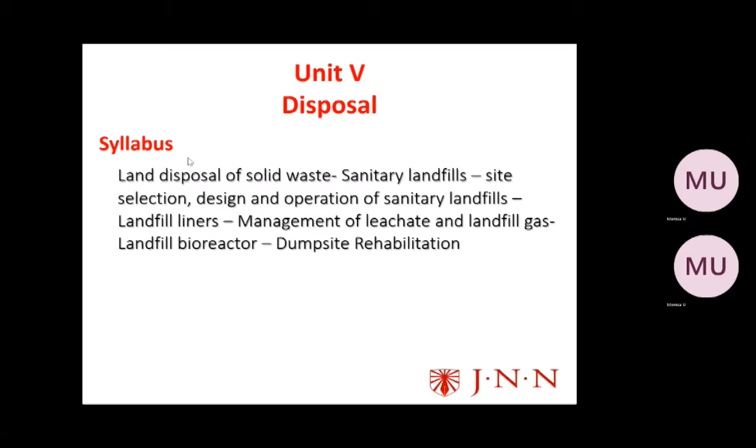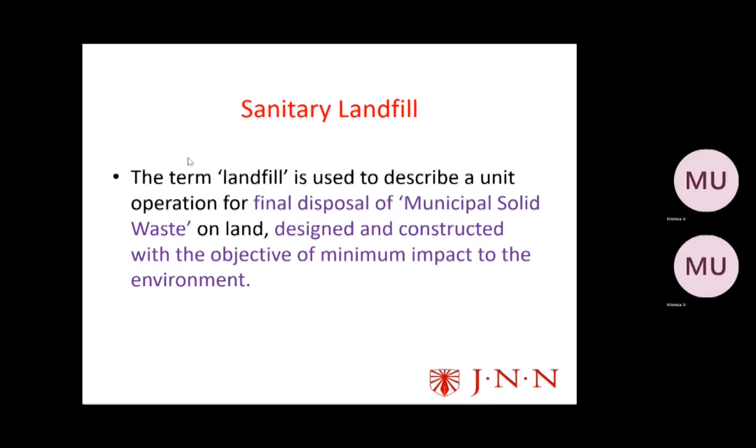Next, dumping of solid waste. Dumping is nothing but - in detail, I can say dumping is we have to dig a pit, and inside that pit we have to put all the waste, and we have to close it in a proper way. That is called dumping.

So it is a mixed waste not found suitable for waste processing. Then pre-processing, post-processing rejects from waste processing sites. Then coming to the non-hazardous waste not being processed or recycled.

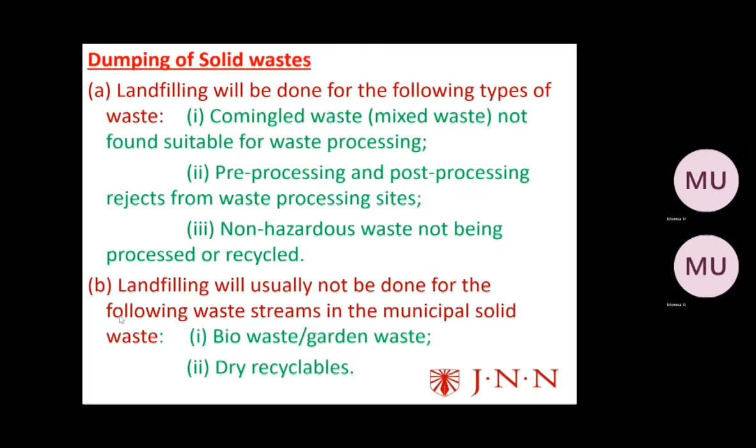In this point, what they're saying is, for example, we can take a chemical factory, and there are some very hazardous, very dangerous, toxic chemicals that are obtained as an output of a particular product. So that hazardous waste is being collected. Now I have to dispose of it. I cannot burn it, or either I cannot incinerate it. I cannot do anything with it, right? So I have to now dump it.

So I have to get permission from the government to a particular site where the hazardous things have been dumped into the ground. I have to get the permission of the government, and only then can I eliminate that particular toxic waste.

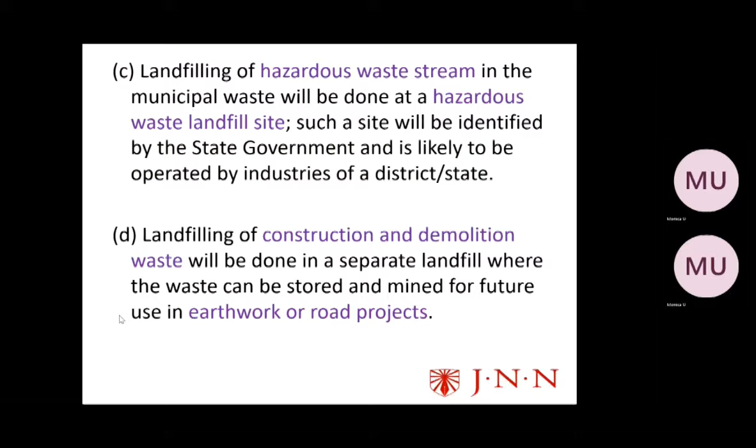Going into the fourth one, landfilling of construction and demolition waste will be done in a separate landfill where the waste can be stored and mined for future use in earthwork or road projects. So coming to a civil thing, all the construction and demolished building parts, or all that waste, will have a separate place to be thrown, so that in future, when there is a need for us to put these things into earthwork, before constructing a building or a road, or before constructing a structure, we should have some landfills, earthfills, right? So for that purpose they will use this demolition waste and so on.

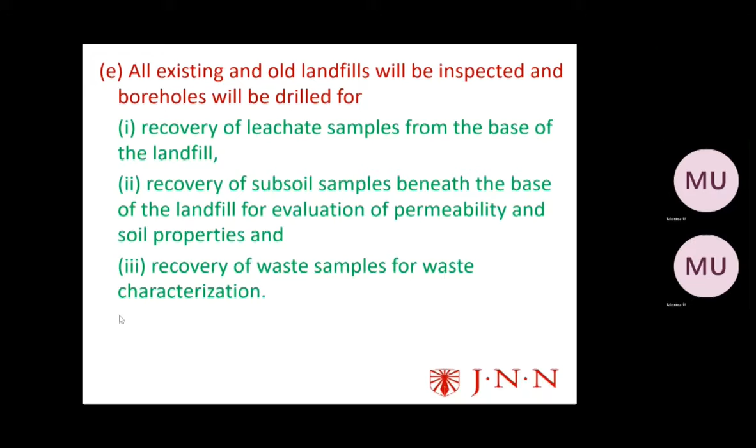Now we know about what is landfill and what are the types of landfill, and what are the categories of waste that has been thrown into different types of landfills. Now, what are the important parts of landfill? That is the essential components of a landfill. There are seven essential components of a municipal solid waste landfill.

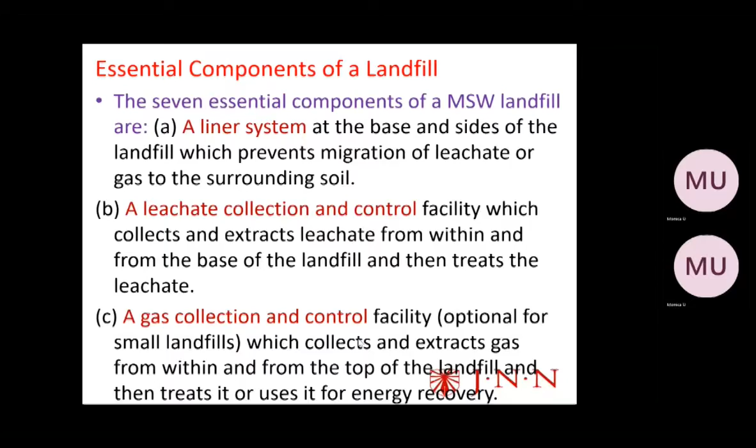Then there is a final cover system at the top of the landfill, which enhances surface drainage, prevents infiltrating water, and supports surface vegetation.

Here, in that point, they are saying there will be a liner at the top of the landfill. That is what they are referring to as a final cover system.

And then a surface water drainage system, which collects and removes all the surface runoff from the landfill site. So when there is a normal surface here and underneath there is a landfill, all the water runoff or other types of waste should not infiltrate or go inside this.

So there will be a proper runoff system besides this, or other arrangements according to the plan. That is the surface water drainage system.

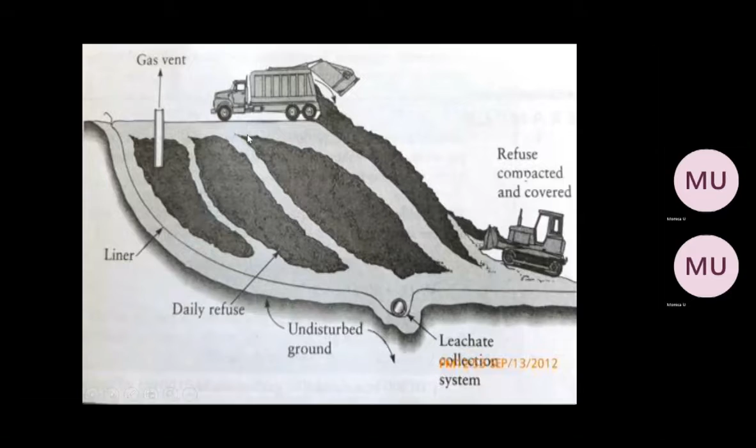And an environmental monitoring system which periodically collects and analyzes air, surface water, soil gas, and groundwater samples around the landfill site. So there will be a monitoring system, a particular team, similar to what we saw in the transfer station.

There is a team which operates and monitors all the equipment and its process. Similarly, there will be an environment monitoring system where they periodically check, collect, and analyze the air, surface water, soil gases, and groundwater samples.

Everything is checked, and if there is a change in any composition, then they will check into the landfill.

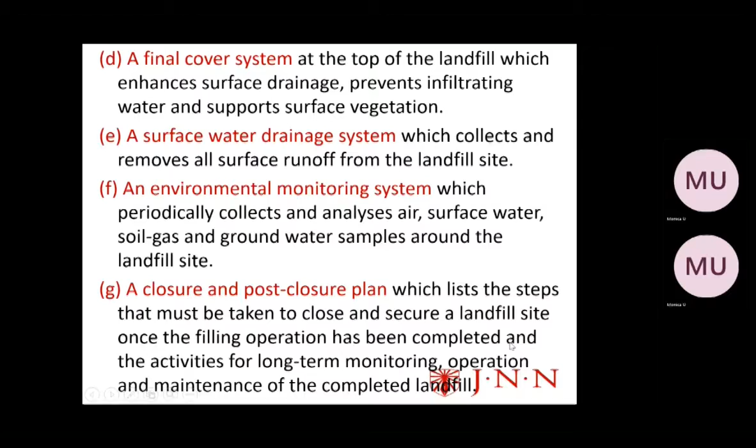Then finally, a closure and post-closure plan, which lists the steps that must be taken to close and secure a landfill site once the filling operation has been completed, and the activities for long-term monitoring, operation, and maintenance of the completed landfill.

So now we have seen all the essential components of a typical landfill. Now we'll go into the site selection for a landfill.

Coming to the site selection for a landfill, selection of a landfill site usually comprises the following steps.

When a large number of landfill sites are available, for example 4 to 8 sites, first we have to set up a locational criteria, then identification of search area.

Then drawing up a list of potential sites, data collection, selection of a few best ranked sites, environmental impact assessment, and final site selection and land acquisition. Now there is a landfill selection for a particular type of waste.

For example, we can take a hazardous waste like e-waste. Shall we take e-waste? Okay, we'll take an e-waste landfill site example.

So first we have to locate the area. What and all is the location criteria there? For example, we can take Tiruvallur district itself. There is a particular site, so the criteria is around the Tiruvallur district in that particular site.

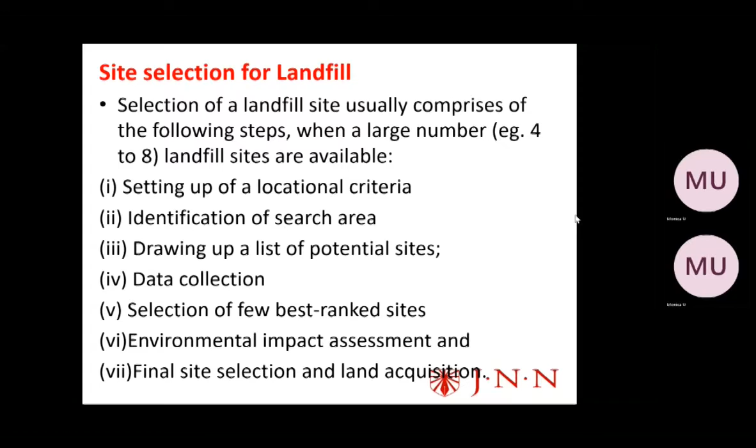Then I have to run an environmental impact assessment. Then final site selection and land acquisition.

Coming to the locational criteria, the following criteria are suggested. First, according to the land location, we have to see lake or pond, that is the water-related things.

So we have to consider the water terrain, which is very important before selecting or constructing something at a particular place, a new place.

So lake or pond: no landfill should be constructed within 200 meters of any lake or pond. Similarly, no landfill should be constructed within 100 meters of a navigable river or stream.

So floodplain, where we should first fix whether it is a floodplain. No landfill should be considered within a 100-year floodplain. I have to take a survey of 100 years to check whether this particular place has undergone any flood situation. I have to go through a plan for a period of 100 years and cross check it.

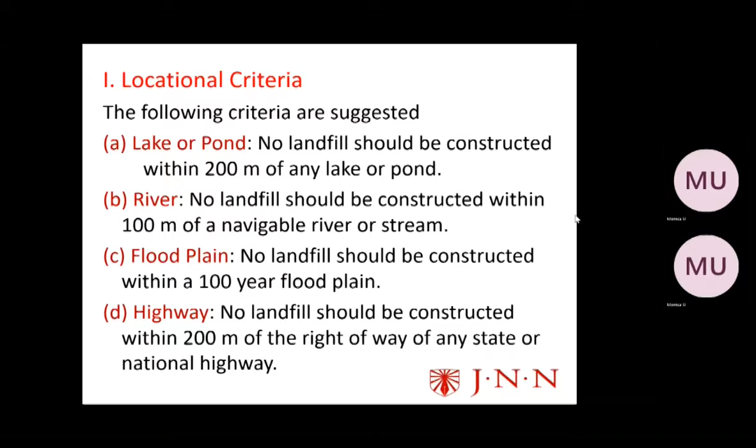Then highway: no landfill should be constructed within 200 meters of the right of way of any state or national highway. So for locational criteria, I have to go through all these different types of categories.

Next, habitation. Habitation is nothing but where people reside, so that is called habitation. A landfill site should be at least 500 meters away from a notified habituated area.

Then public parks: no landfill should be constructed within 300 meters of a public park. Then critical habitat area: similarly, no landfill should be constructed within a critical habitat area.

Then wetlands. Wetlands means when the soil is very weak and has more porosity. So we should not construct this landfill within a wetland.

Then groundwater. What we have to do is check the groundwater table. This landfill should not be constructed in areas where the water table is less than 2 meters below the ground surface.

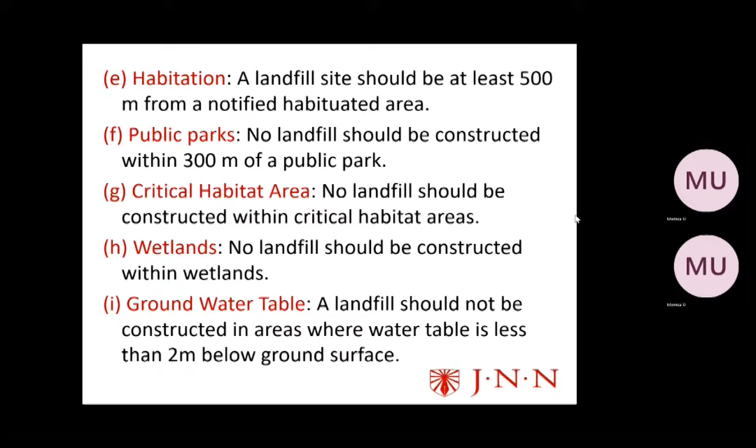Then airports: we have to consider the airport thing. Then water supply well: this landfill should not be constructed within 500 meters of a water supply well.

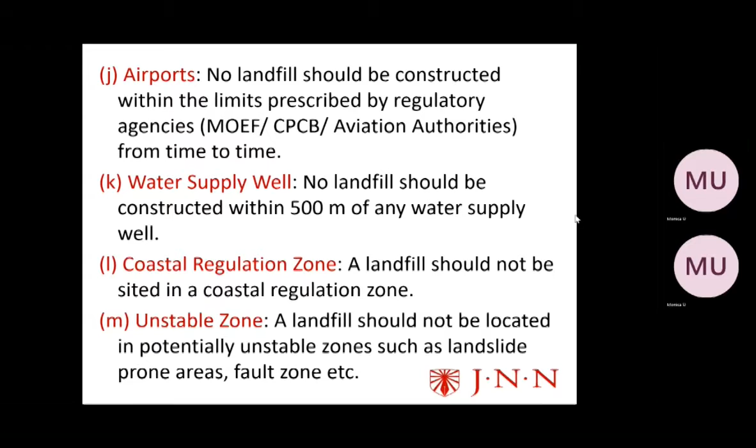Then coastal regulation zone, which is where all the seas and oceans are present. According to that, this landfill should not be sited on a coastal regulation zone. Then unstable zone. So all these categories fall under locational criteria.

Okay, then search area. Coming to search area: the search area is usually governed by the economics of waste transportation, so it is usually limited by the boundaries of the municipality. Typically, search areas have a search radius of 5 to 10 kilometers, keeping the waste generating unit as the center.

So we can take our college itself as the place where waste is being generated. We have to put a center mark at our college, and from the center of the college we have to go to a search area radius of about 5 to 10 kilometers.

Alternatively, a search area of range 5 kilometers all around the built-up city boundary can be used.

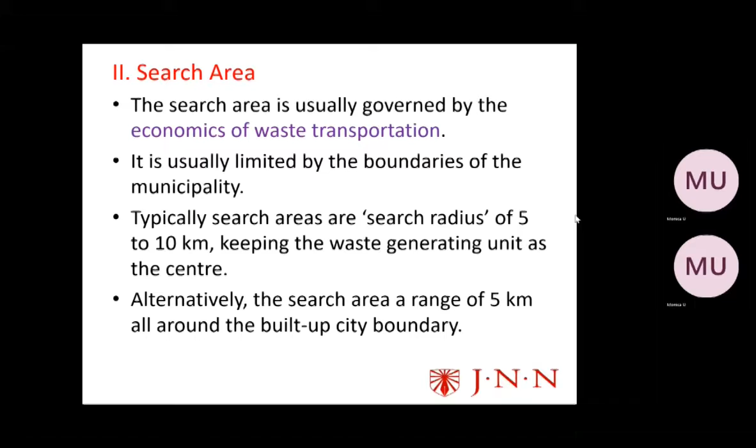Next is the third one, the potential site: development of a list of potential sites. After satisfying the above two criteria, areas having potential for site development should be identified. So first, we have to check it with the roadmap. A roadmap may be used to show the potential sites that satisfy the locational criteria.

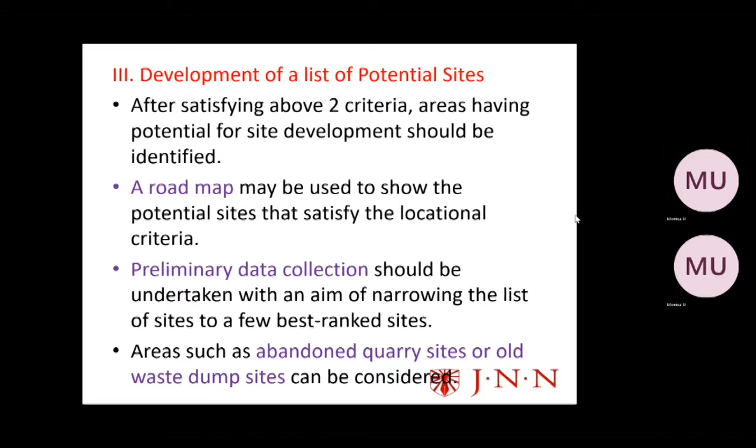Then the preliminary data collection should be undertaken with an aim of narrowing the list of sites to a few best ranked sites. Then areas such as abandoned quarry sites or old waste dump sites can be considered. An abandoned quarry site is one that is not in use, which we can take into consideration, or any other old waste dump sites can also be considered.

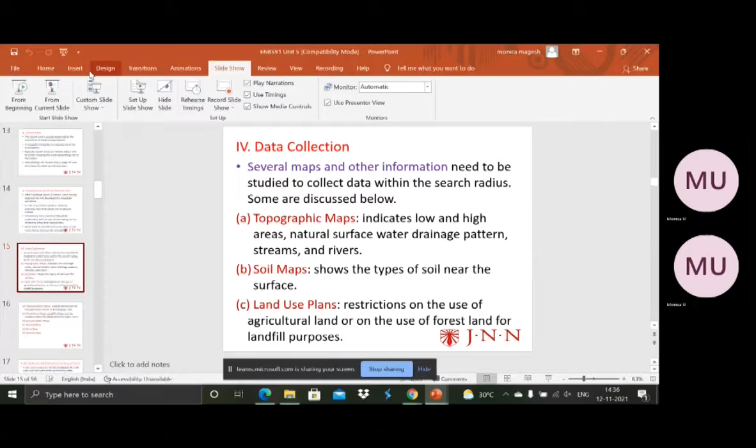Next is data collection. Several maps and other information need to be studied to collect data within the search radius. As we saw before about the search area, it should be from the center of the waste generation area, about 5 to 10 kilometers in radius.

After that, some of the data collection should be based on certain topics: the topographic map should indicate the low and high areas, natural surface water drainage pattern, streams, and rivers. Soil maps should show what type of soil is near the surface, or the type of soil where the site is being selected.

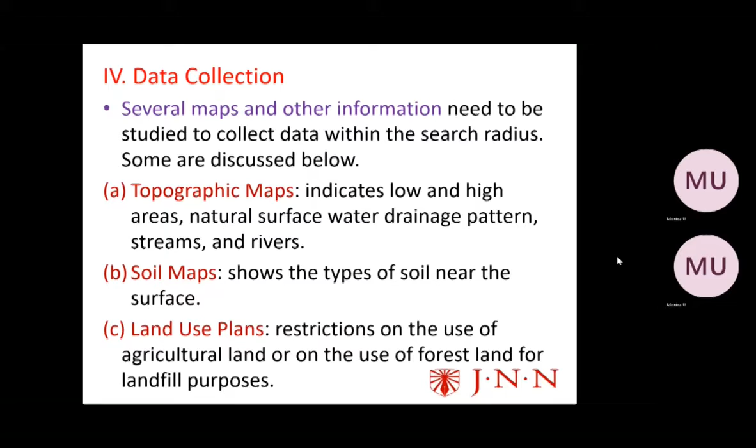All the soil details or requirements, everything. Then land use plans, restrictions on the use of agricultural land or forest land for landfill purposes. So we should not take agricultural or any forest land for the usage of landfills.

Next is the transportation maps. This one is used to determine the transportation needs in developing a landfill site.

Then comes the floodplain map. So landfill siting must be avoided within the floodplains of major rivers. As we saw before, the particular landfill site being selected should have 100 years of history checked for any flood situation that occurred at that selected site. Then the groundwater maps, rainfall data, wind maps, and the seismic data.

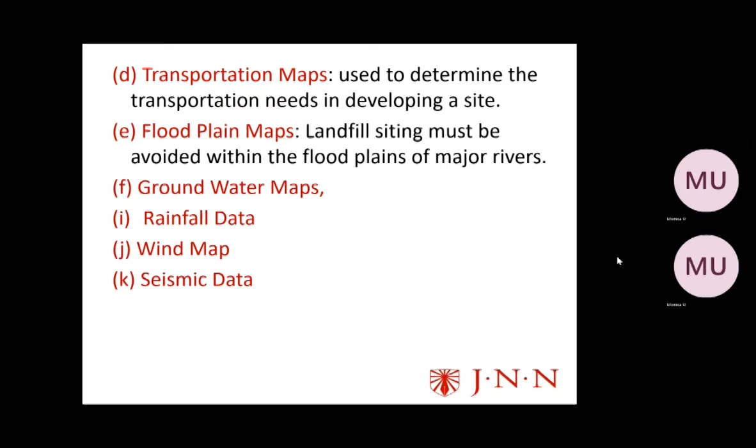Seismic data is nothing but the earthquake details.

Next one, the site walkover and the establishment of ground truths. So coming into this topic, a site reconnaissance will be conducted by a site walkover as part of preliminary data collection. It is nothing but site visiting. All features observed in various maps will be confirmed. So it is the first and foremost site visit, that is what they are saying in this subtopic.

So the next is the additional information pertaining to the following will be ascertained from nearby inhabitants. First is the flooding during monsoons. Monsoon is nothing but the rainfall period. Then the soil type, depth of the GW table, that is nothing but the groundwater table, quality of groundwater, and the depth of bedrocks.

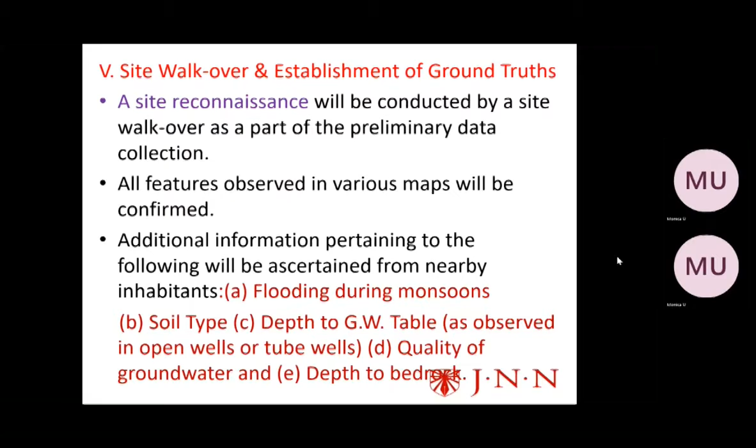Then the sixth topic is about the preliminary boreholes and geophysical investigation. At each site, 1 to 2 boreholes will be drilled and samples collected at every 1.5 meter interval to a depth of 20 meters below the ground surface. So what they will do is after the site visit, they will drill about 1 or 2 boreholes, then collect soil samples about every 1.5 meter till the depth of 20 meters.

For the following data, the following information will be obtained by collecting this soil at an interval of 1.5 meter: soil type and its stratification, permeability of each stratum, strength and compressibility parameters, groundwater level and its quality, and the depth of the bedrock.

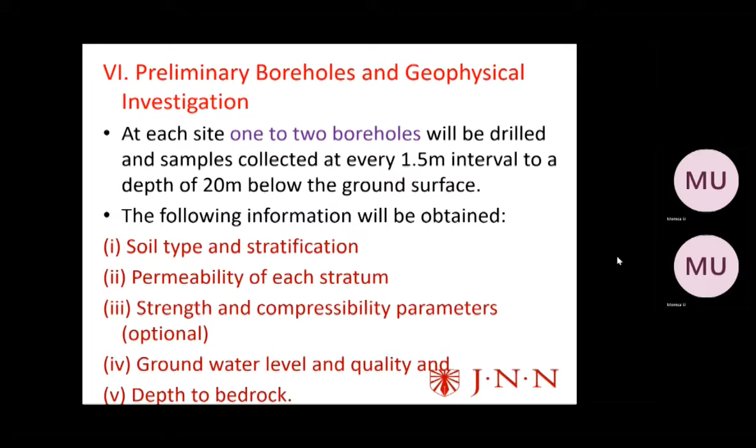The seventh one is the assessment of public reaction. So here itself we can have a vague idea by taking some surveys or general talks with the public around the selected site. A preliminary assessment of public opinion regarding all the potential sites in the list is essential. Public reaction is less hostile if landfilling is done in an area already degraded by earlier municipal waste dumps or other activities such as quarrying, ash disposal, etc.

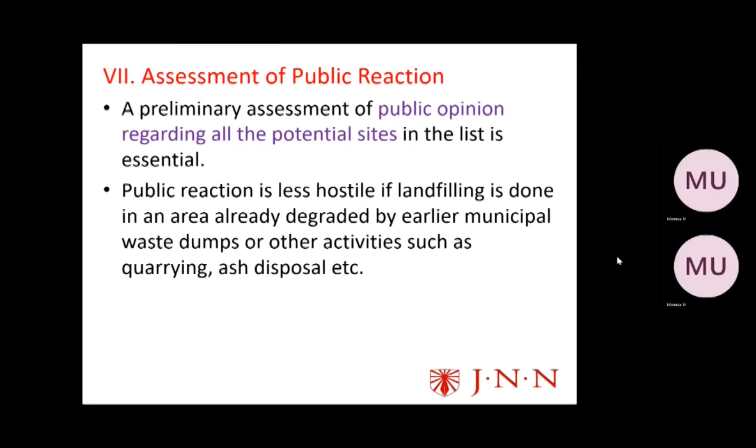Next, selection of few best ranked sites. So from among a large number of sites, the selection of the final site will emerge from a two-stage approach. That is, selection of few best ranked sites, usually two sites, sometimes three best sites will be selected in the first category.

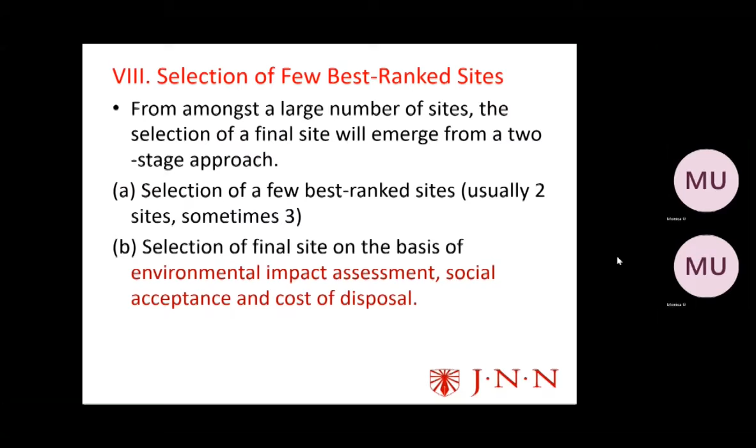Second one is the selection of the final site on the basis of environmental impact assessment, then social acceptance and the cost of disposal. So from the disposal site, or from the transfer site to this particular site, how much distance, then we have to consider other costs as well - cost of the equipment, cost of petrol, then labor cost, all those things we have to consider. So this selection of best ranked sites falls under these two categories.

Then the ninth one is the EIA, environmental impact assessment. This EIA is very important in terms of management. So wherever feasible, environmental impact assessment will be conducted for two alternate sites, in exceptional circumstances up to three sites.

The impact of the landfill on the following will be quantified: groundwater quality, surface water quality, air quality which is part of gas, dust, litter. Then aesthetics - meaning visually how it is looking - visual vermin and flies, noise, land use alteration, traffic alteration, then drainage alteration, soil erosion, ecological impacts, everything we have to consider.

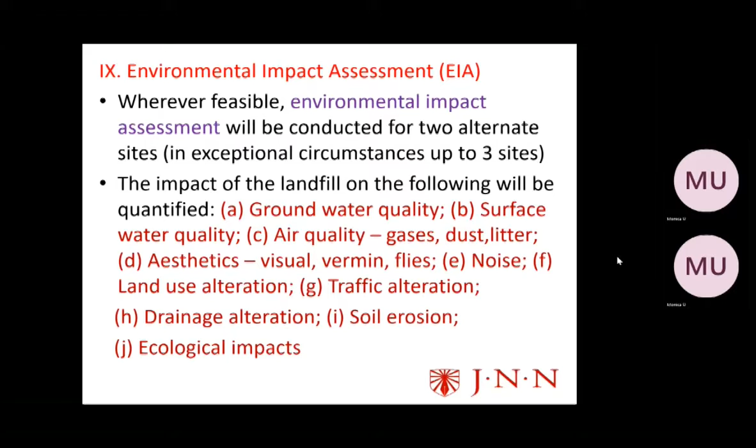So on the basis of EIA, environmental impact assessment, then finally the final site selection. So from this, the final site selection from amongst the best ranked alternatives should be done by comparing them. So now we have ranked three best sites.

Rank one, two, three - we have selected three different sites. So now we have to compare those sites under these categories: the environmental impact, social acceptance, and the transportation and landfilling cost, to determine which is most feasible according to the criteria.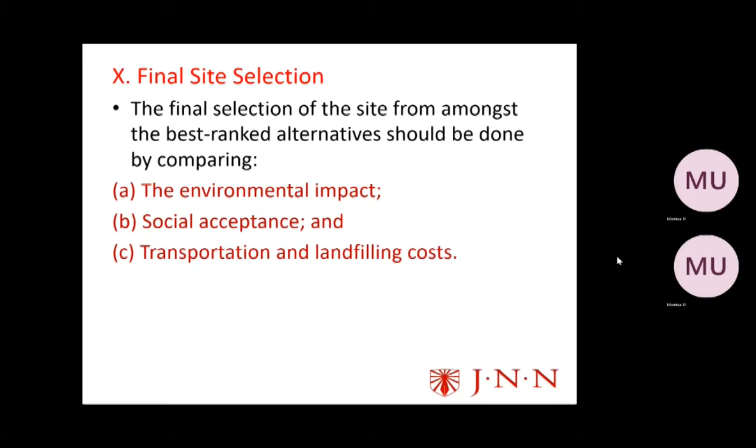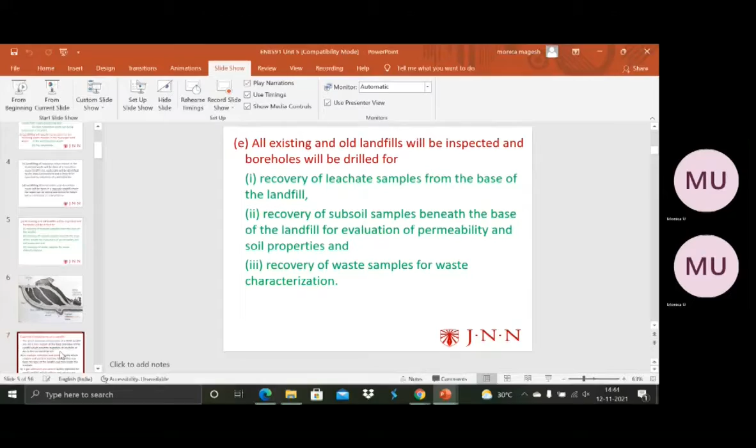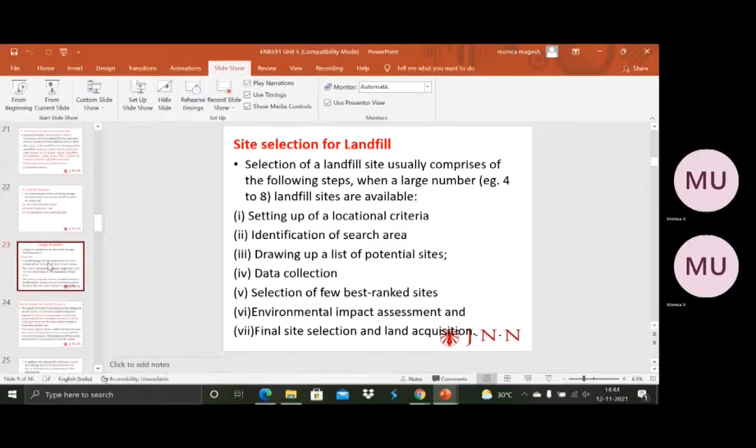We have to select the best landfill site. So we saw about landfill, selection of landfill. Till this we saw about the dumping of solid waste, then the essential components of landfills and site selection of landfills. Under the site selection of landfills, we saw about almost 10 categories of site selection of landfill. Now we have selected a particular site for this particular type of landfill. Now we have to design the landfill. So what is design life and what is design and what type of design of landfill we are going to see, we'll be seeing further.

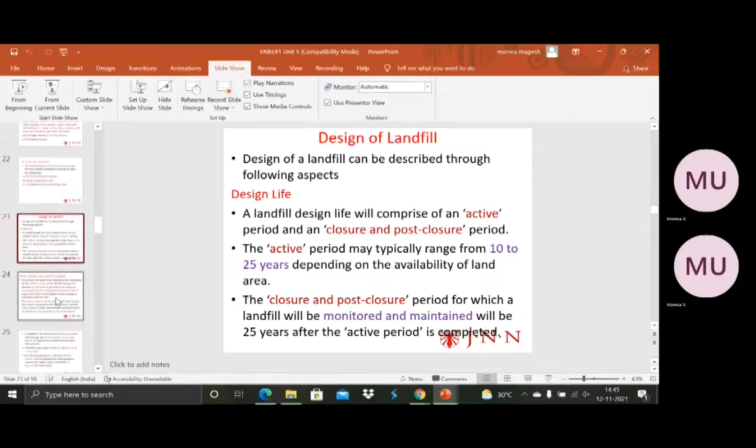So here, design of landfill. Design of a landfill can be described through the following aspects. First is the design life. A landfill design life will comprise of an active period and then closure and post-closure period. We can categorize this particular design life into three things: active period, closure period, and the post-closure period.

So what is active period? The active period may typically range from 10 to 25 years depending on the availability of the land area. Next is the closure and post-closure period, for which a landfill will be monitored and maintained, will be 25 years after the active period is completed. So before 25 years, ranging from 10 to 25th year is the active period, and after the 25th year period is the maintenance and monitoring of the landfill site. That is called the closure and post-closure period.

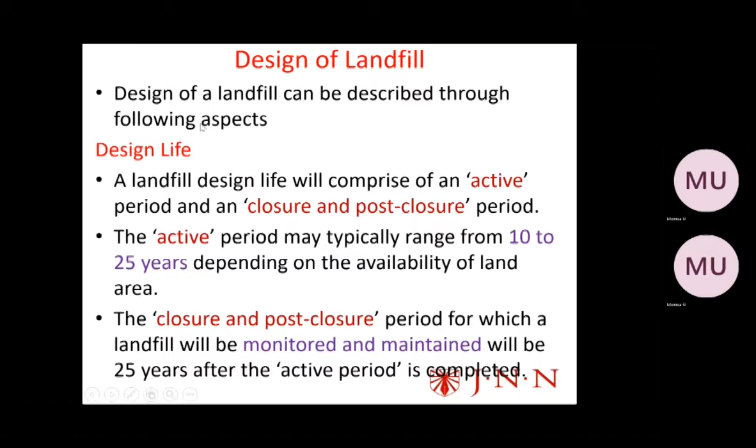So this design of landfill is based on different aspects as told before, first is the design life. Next will be the waste volume and landfill capacity. Amount of waste that is being generated and collected and transferred to the disposal site, amount of waste, the volume and the landfill capacity.

So the volume of waste to be placed will be computed for the active period of the landfill, taking into account first the current generation of waste per annum - for example, for 1 year how much waste is being generated per annum. Then category B has the anticipated increase in rate of waste generation on the basis of past records or the population growth rate. For example, for this particular 2021 year, I have a certain amount of waste being generated for the whole year. I'm calculating the volume of waste generated for this particular year. Then the next category, we have to anticipate and calculate the increase in rate of waste generation according to either past records or the growth of population.

Next is what they call the actual capacity. The actual capacity of the landfill will depend upon the volume occupied by the liner system and the cover material - that is nothing but the daily, intermediate and the final cover, as well as the compacted density of the waste. In that cross-section diagram of the landfill, we saw where the liner system will be present. So we have to consider that liner system, the top final cover, and the compacted density of the waste. That is the actual capacity of the landfill.

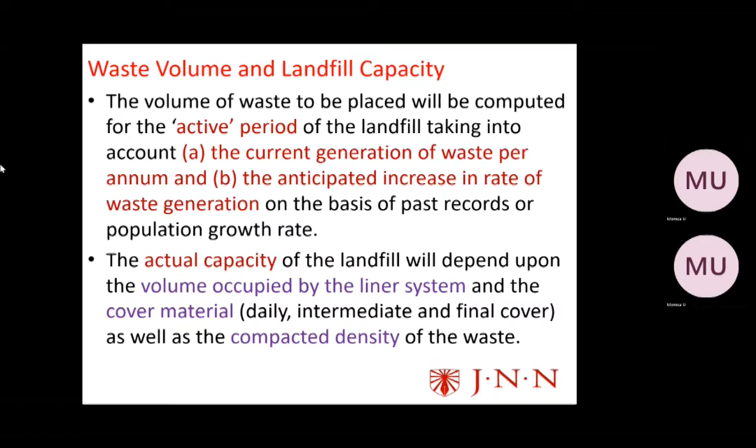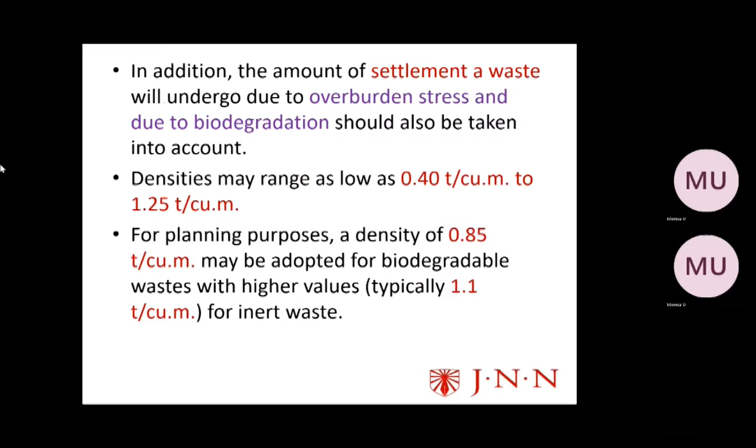In addition, the amount of settlement a waste will undergo due to overburden stress and due to biodegradation should also be taken into account. The density should range as low as 0.4 ton per cubic meter to 1.25 ton per cubic meter. For planning purposes, a density of 0.85 ton per cubic meter may be adopted for biodegradable waste, and for higher values it should typically range about 1.1 ton per cubic meter for inert waste. The total landfill area should be approximately 15% more than the area required for landfilling, to accommodate all infrastructure and support facilities, as well as to allow the formation of a green belt around the landfill.

So what they are saying here is, let us take an example of about 3 to 4 acres I'm taking into consideration for a particular dumping of waste in a landfill. So I'm taking about 3 to 4 acres of site for a particular landfill.

So approximately 15% more area should be required for this landfill, so that I can accommodate the infrastructure, other buildings, facilities, and monitor it. We have to be on the safer side, so we should have some more space, about 15% approximately. That estimated landfill area should be more for accommodation of the green belt around the landfill and other infrastructure buildings. We need some more area from the estimated area of the landfill. That is what they are saying here.

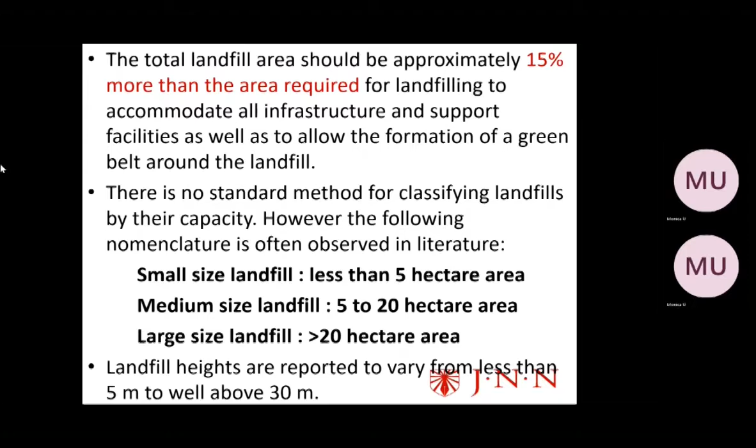Then coming to the layout. A landfill site will comprise the area in which the waste will be filled, as well as additional area for support facilities. What we saw in the last slide is only this particular point. Within the area to be filled, work may proceed in phases with only a part of the area under active operation. So the work will be categorized into different phases.

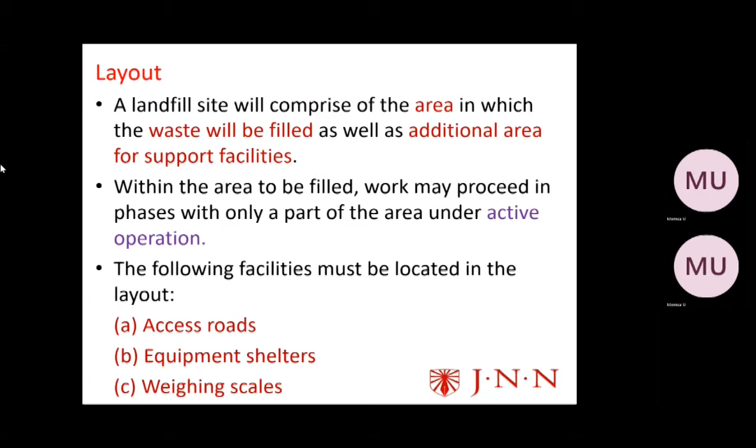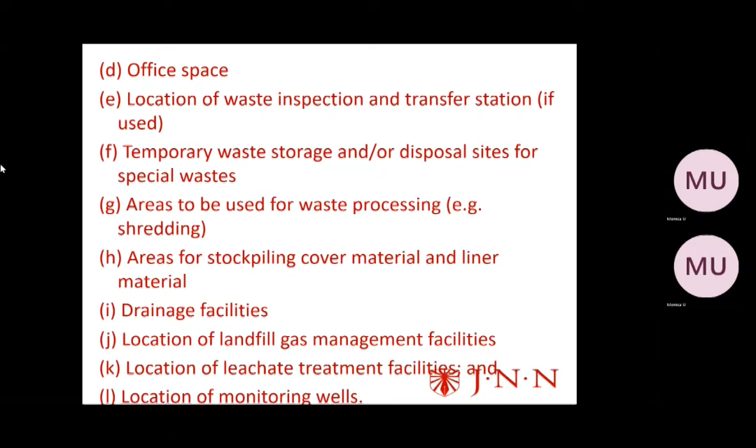The following facilities must be located in the layout: access roads, equipment shelters, weighing scales, office space. I said that 15% of the work area should be more than the estimated landfill, so that 15% area should accommodate all these things - access roads, equipment shelter, weighing scales, office space, location of waste inspection, and the transfer station if needed. Then a temporary waste storage, disposal site, or areas to be used for waste processing, example shredding, which we saw in unit 4. Areas for stockpiling cover material, drainage facilities, location of landfill gas management, location of leachate treatment - all these things come under that 15% area.

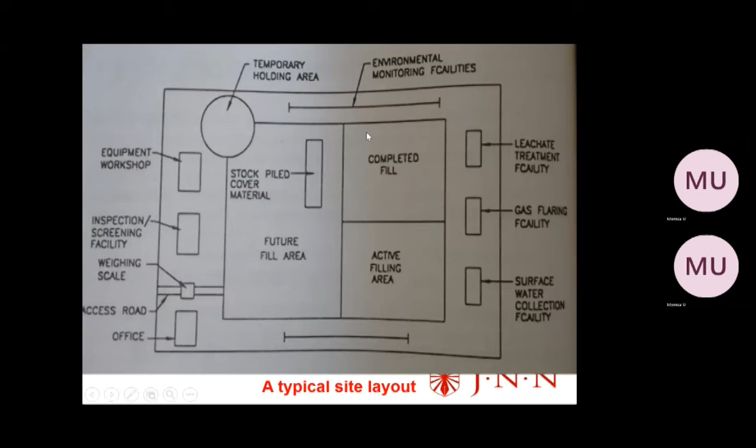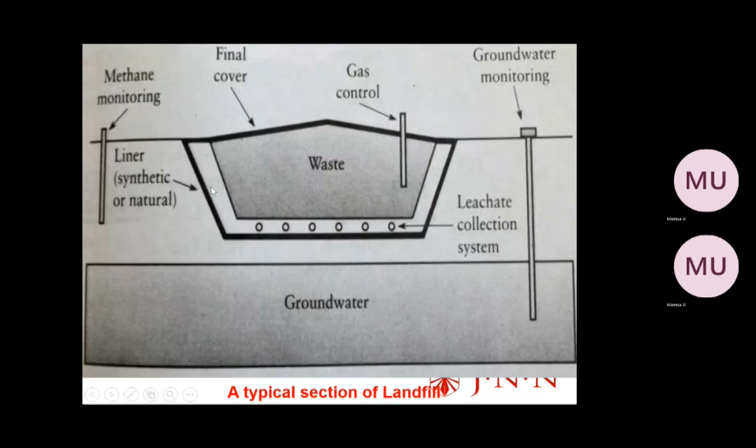This is a cross section of a typical landfill. Here all the waste will be dumped. In that first picture we saw a gas control area - gas vent area, so this is a gas control. Here underneath, this is the other soil, apart from this landfill, and groundwater monitoring. This waste should not mix with this soil and the groundwater, so that's why we are providing a leachate collection system under this waste. Then we have this thick black layer which is the final cover. Then we have here the methane monitoring. And this landfill liner, which we call, is mostly synthetic or natural material. So this is what a typical section of a landfill area looks like.

Then coming to the operation of a landfill. We saw about what is a landfill, then all the necessary things about site selection of a landfill, and design of a landfill. Now we have to see about the operation of a landfill. So here, to secure public acceptability, landfill operations require careful planning and determination of the extent of environmental effects.

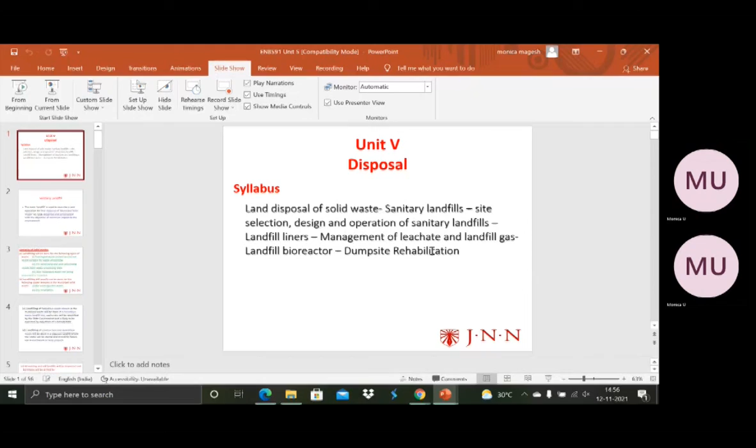So till here we saw about landfill, land disposal of solid waste, sanitary landfills, about the site selection, design, and operation. In the other session, we'll see about the management of leachate, landfill gases, and all these things. So we'll stop it for today now.